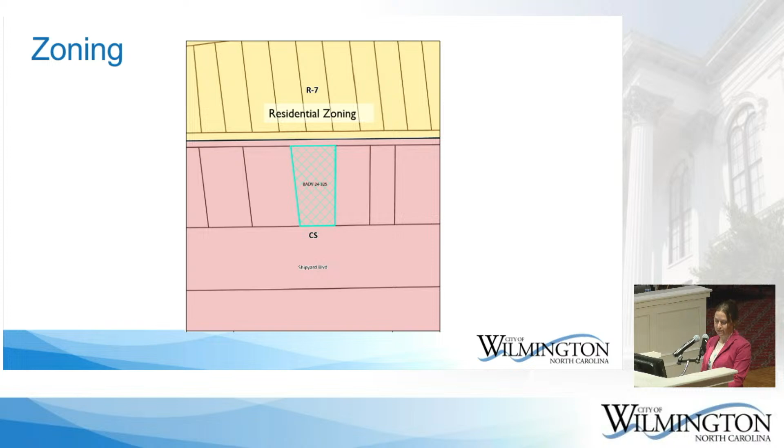Based on the site's location within 650 feet of a single dwelling district and the square footage of the proposed building, the applicant is only required to provide 5 parking spaces. The proposed site plan shows 11 parking spaces, plus a garage door on the rear that may accommodate additional parking within the building, which is more than double the required parking for the proposed use.

In lieu of a reduction to the required parking, the applicant has requested variances to landscaping requirements set forth in City Code Sections 18.318 and 18.321. City Code Section 18.318 requires that parking areas contain sufficient tree coverage to shade 30% of the impervious vehicular use area associated with the project.

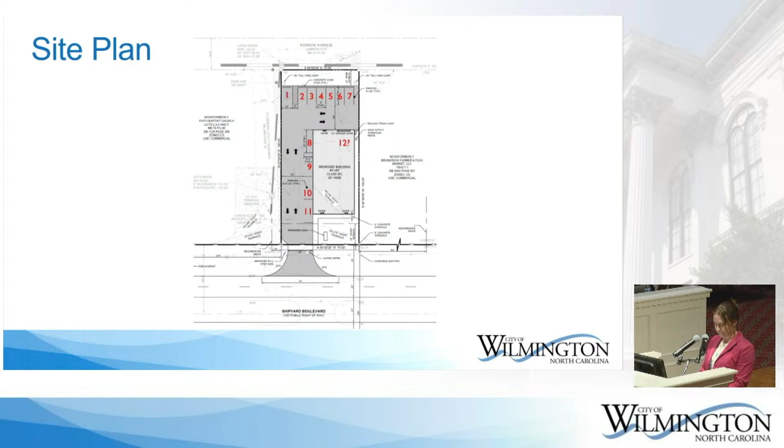Staff would also like to note that the tax map included in the applicant's submittal shows that there was landscaping on the site as of May 2019, but that has since been removed, and there are no approvals on file with the city for removal of that landscaping.

On January 30th, 2025, the applicant submitted a request for a variance to City Code Sections 18.318 and 18.321 to eliminate all requirements related to parking lot landscaping. This matter is set for hearing before the Board of Adjustment today, March 20th, 2025.

I'd like to ask that the board place the case summary and all attachments into the record. I'm happy to answer any questions you may have of staff, but the applicant is also present. Anybody have any questions at this time?

Thank you very much for that presentation, and I'm glad you're concerned about having proper coverage as well as other landscape features. My question is, has somebody calculated what the magic number of parking spaces might be if you also had the 30%? The illustration you just provided was less than 30%, but it's illustrative. Is there a compromise or middle ground number that you all have calculated, or that the applicant could?

We've calculated what the minimum parking requirement would be, and those spaces would be 8.5 feet wide by 18 feet deep. The required handicap space would be larger, of course. We haven't calculated what 30% of that would be on a site plan, because it depends on tree placement. Let me go back to the diagram. Each tree isn't 100% shading the parking lot, so it would just be the portion of the canopy that actually provides that shading.

All right, anybody else? All right, thank you. We'll next ask if the agent for the applicant would like to come up.

Good afternoon, Cliff Brom, RC Engineering, 15226 US Highway 17 in Hampstead.

The business going in here is a relocation of East Atlantic Plumbing. The owner was looking to relocate, found this piece of property, and he's just an old country gentleman, and he had actually gone in and removed trees, built a parking pad, and ordered his building before somebody realized what was going on, not sure who, and told him, 'hey, you need to pump the brakes.' That's where we got involved and started helping him with the site plan and everything.

As you can see on the site plan, the problem we have is we've got 10 pounds of potatoes we're trying to put into a 5-pound sack. So naturally, we've got potatoes that just won't fit.

Like I said, this is a plumbing business. Currently, Mr. Richards has 12 employees, I think 10 technicians, plumbers, and an admin staff of 2. That's the reason we designed the parking like it is, to accommodate his current staff.

Other questions for either the city or the applicant's agent? Yes sir, if I may, perhaps for the city, if you could go back to that slide that shows the lot again without the mock trees, the mock-up of the trees. I'm just trying to figure out what's going on right in front of the proposed structure.

Is that something that cannot be used for that sort of, yes, exactly where your arrow is. Is that something that can't be used for parking, or what's going on there? Yeah, that piece, that's the required sidewalk in front of the building. And then that sidewalk has to come down parallel to the drive.

Okay, and connect to the sidewalk out front. I see. But as far as the rest of the area, yes, that is open. The only caveat there, and it's hard to see on this site plan, is that there is a sight triangle that will be required by both the town and the DOT that will have to remain open, and that sight triangle takes up a fair portion of that open area.

The reason I am asking this is because I was wondering if there were space potentially there for, if one could use some of that for parking in lieu of some other piece of what we're otherwise seeing as parking spaces, if you see what I'm saying. And as long as it was acceptable to the town, I think we could probably get in.

I don't have my glasses, I can't see. Let's see. I'm not sure what the dimension is off of that. Well, we could get two spaces in there, and I'm not sure. I know on another project I've got, DOT requires a certain setback from the road for the parking. And I'm afraid in this situation, since we're right there on the road pretty much, if we try to put parking in front of the building, we would be in violation of the DOT standards.

So with the impervious surface, we would still have to have the islands on the sides of those, the rear parking, what's shown on here now that you can see, 2 through 6. Which would eliminate 2 parking spots. And we would still have to have the landscape strip down the left-hand property line, which then would eliminate parking spots 8, 9, 10, and 11.

So if I understand correctly, and the city can correct me if I'm wrong, with a lot like this, the minimum number of parking spots one should have is 5. You all are planning 11. The maximum would be 12. Maybe you don't know this yet, sir, because you may or may not have talked about this with the person you're representing, but how many parking spaces do you all really need between this magic number of 5 and the proposed number of 11? In other words, are all 11 really needed? I guess that's the bottom line question, sir.

As I mentioned earlier, right now his current staffing levels are 10 technicians, plumbers, and an admin staff of 2, so he's got a staff of 12 at the moment. And all of his technicians have company vehicles, which would be parked on the premises overnight, weekends, and holidays. So there would be a minimum of 10 spaces needed in the evenings and weekends.

Catherine, let me ask you a question. Is there room to continue a conversation on what could be done to accommodate the parking? Right now it doesn't seem there was enough of a conversation. You sort of got surprised when you went to TRC because no one had looked at it before. But it looks like there might be a way that if we continued this to our next meeting, you might be able to meet with the city to come up with a compromise. Because for us, we're going to have to rule based on the 4 findings of fact.

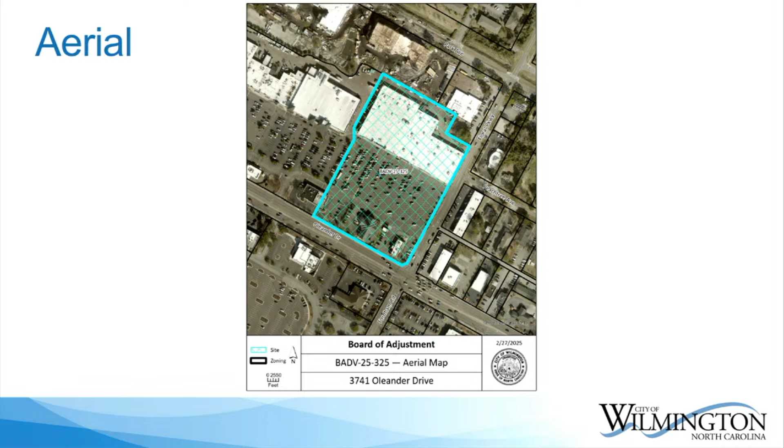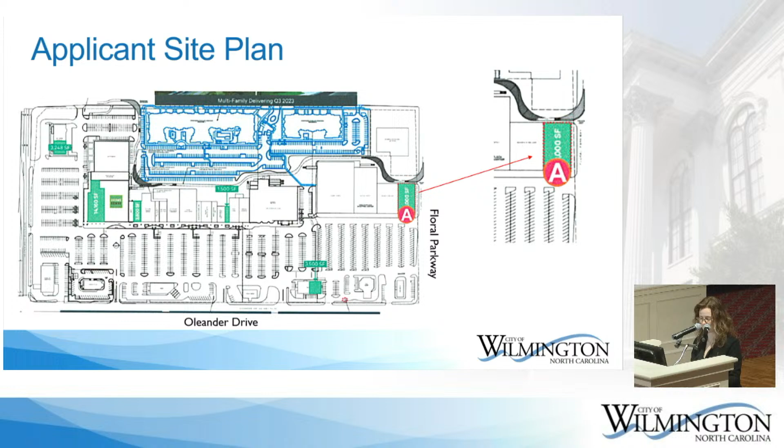The variance request pertains specifically to a corner unit within this shopping center. On or about February 6, 2025, city zoning staff issued approval for a change of use permitting a general retail use to operate from this location. The applicant has proposed one wall sign measuring 131.43 square feet to be mounted on the south-facing facade of the unit.

The Land Development Code Section 18-389 states that multi-unit buildings shall be permitted either 2 wall signs per unit, no more than 1 per facade, up to 50 square feet total, or 200 square feet per building, whichever is greater. Due to the number of units within the building, the option permitting up to 2 wall signs per unit, up to 50 square feet total, provides the greatest amount of signage.

The applicant has requested a variance to Land Development Code Section 18-389 to allow 1 wall sign at 131.43 square feet, a variance of 81.43 square feet.

The applicant states that the visibility of a 50 square foot sign would be limited due to the building's location on the backside of the parcel, as well as the existence of multiple structures on the front of the parcel, further obscuring the view of this unit.

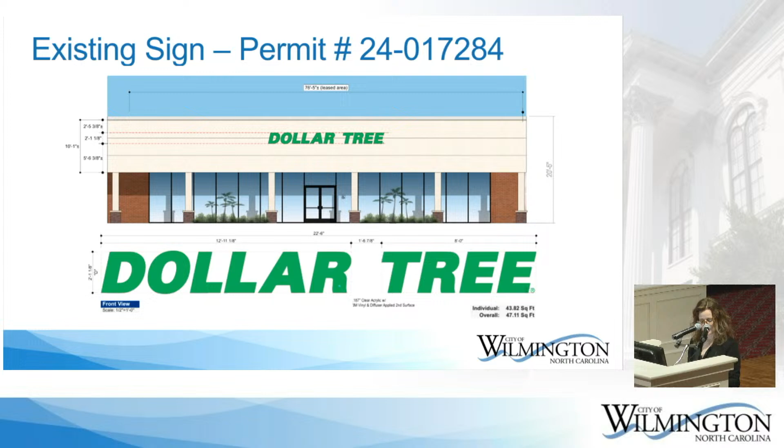In December of 2024, the applicants also received city and county permit approval to install a 47 square foot wall sign at this location, which received a final zoning inspection on or about March 17, 2025. In January of 2023, the Board of Adjustment considered a similar request for a retail tenant in the same shopping center to install a 169 square foot wall sign and determined that the request did not meet the criteria for the board to grant a variance.

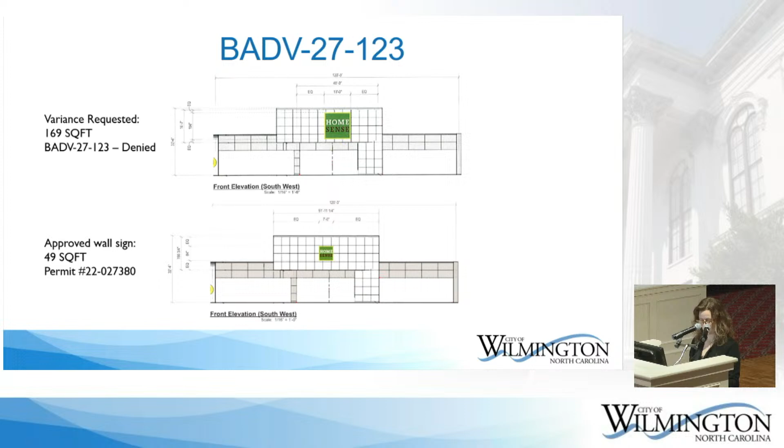On February 4th, 2025, city staff accepted an application for a variance to the wall sign standards for a multi-unit building in the commercially zoned district. This matter is set for hearing before the board on March 20th, 2025. I'd like to submit this report and all the attachments to the record. I'm available for any questions, and I believe the applicant's representative is as well.

Is the sign that's on the building now out of compliance? No, it's within compliance. Okay, thank you.

Anybody else have questions? Yes, sir. Thank you very much for that. Just to make sure I heard correctly, is it theoretically possible to have 2 50-square-foot signs, given the configuration of this building, ma'am? They could have up to 2 signs, but the total area of those 2 signs can only be up to 50 square feet. I see. Thank you. All right, anybody else?

All right, thank you. We'll go for the applicant. We show Heather English. Is someone here to speak on behalf of the applicant?

Good afternoon, everybody. I am Heather English. I am the agent for the sign company and here on behalf of Dollar Tree. Okay, thank you. Can you just state your address for the record? Sure, 8552 Racine Road, and that is in Pleasant Garden, North Carolina, 27313. All right, thank you.

So Dollar Tree loved this unit, moved forward, and this shopping center building is set back about 450 feet from the street. There's a Hardee's, a bank, and also a retail store formerly a Talbot's, clustered in front of this building. Coming each direction down Oleander, those buildings obscure view of the front of that building.

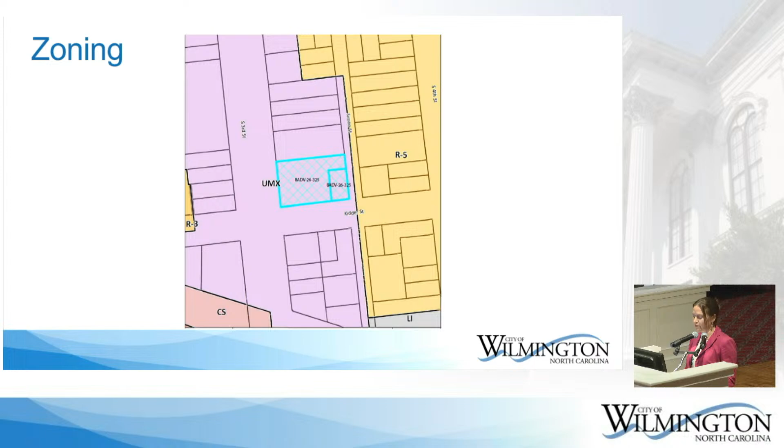Thank you. The subject property contains approximately one-third of an acre. It's located at the northeast corner of 3rd and Kidder Streets and currently contains a commercial structure that most recently operated as a contractor's office. The property is zoned urban mixed use, with other UMX zoning to the north, south, and west, and residential zoning to the east. The UMX district supports a fine grain mix of residential and commercial uses within close proximity to one another, and per the purpose statement outlined in City Code, this district is established to assure an appropriate development pattern is maintained within the 1945 corporate limits by establishing district regulations, including design elements intended to enhance the urban form, increase neighborhood safety, add flexibility for small urban lots, and complement the historic built environment.

The applicant has proposed to develop the property with a residential townhouse project consisting of 8 two-story units.

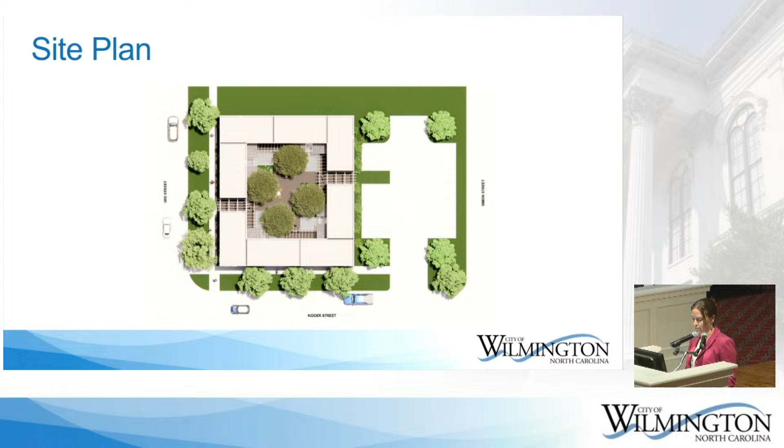The applicant attended a pre-TRC meeting in March of 2023 and was informed of various code requirements necessary for development of the site, including fenestration and alley access rather than accessing from 3rd or Kidder Street. In May of 2023, the applicant obtained a variance to allow direct access from Kidder Street, and the site plan included in your case summary has been updated accordingly.

Also, as part of the formal TRC review, the applicant submitted elevations for the proposed project. In reviewing those, staff determined that the fenestration requirements had been misapplied. Fenestration by code is defined as the arrangement, proportioning, and design of openings, mainly windows and doors, on a building facade, and city code allows glass used to satisfy that requirement to have a maximum of 15% reflectivity. The term fenestration is also sometimes interchanged with glazing.

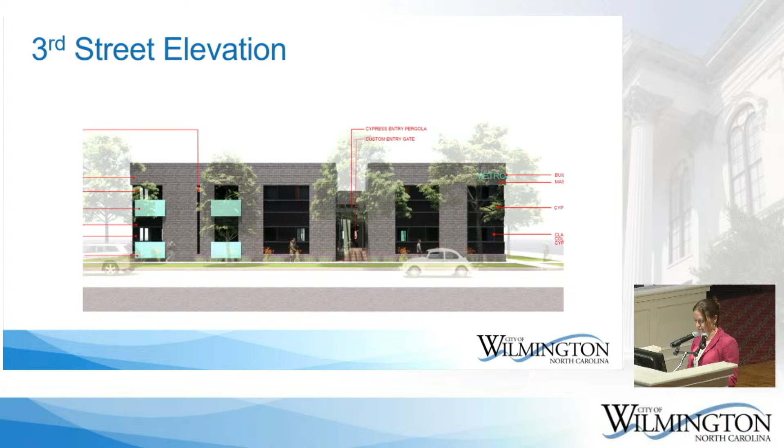Land Development Code Section 1844 sets forth design requirements for buildings in the UMX district to ensure compatibility with the existing development pattern and urban form in general, by requiring that building facades incorporate periodic transitions such as facade offsets, pilasters, changes in materials, or fenestration, and also requires a minimum of 50% fenestration along those street-level facades.

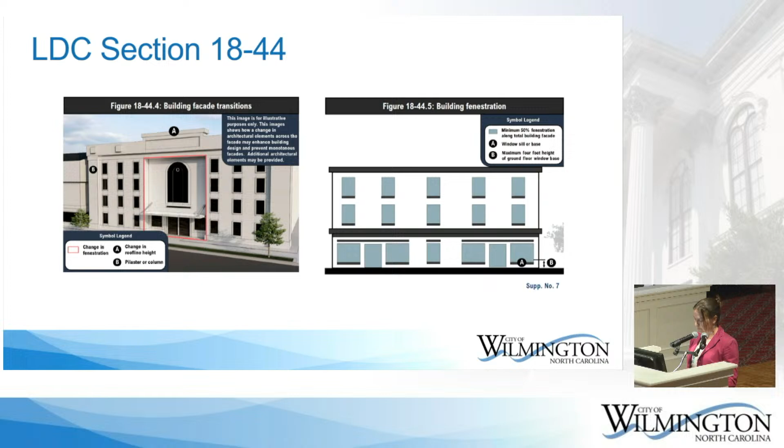Though fenestration can serve as a building transition, a change in materials does not constitute fenestration unless that material is transparent. The illustration on the left demonstrates the meaning of facade transitions, while the illustration on the right shows fenestration requirements and clearly depicts windows and glass openings as those elements used to satisfy the requirements.

This illustration, prepared by the applicant, shows what they've included for the purposes of calculating fenestration, which amounts to 59% of the ground floor facade. However, the applicant has included solid material as glazing.

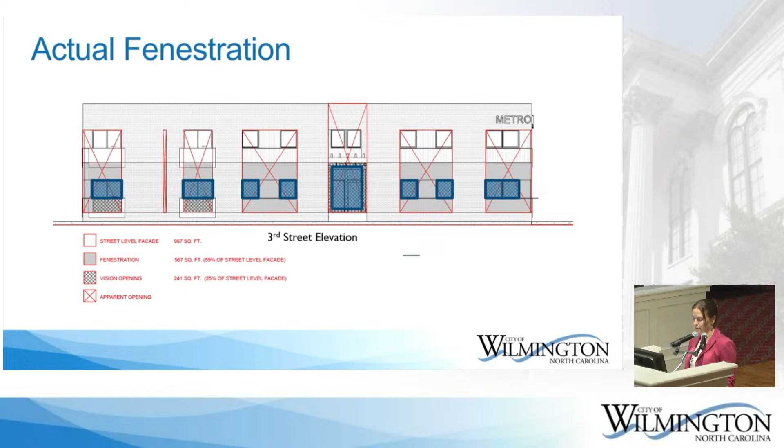What's shown in blue outlines the portion of the facade that would be considered fenestration per city code. And that appears, just taking all the boxes and shoving them into a corner, to be about maybe 20% of the ground floor facade, and that's along the 3rd Street elevation.

We'll just quickly give the same rundown on the Kidder Street facade, along which fenestration requirements are allowed to be reduced from 50% to 30%, as long as the applicant includes additional architectural treatment along that facade.

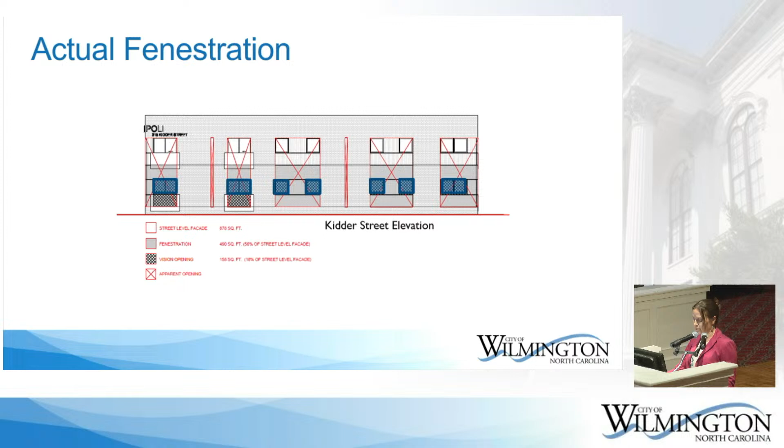So this illustration shows the applicant's calculation, again including some solid materials. This illustration shows staff's assessment of what should count, and this illustration would suggest that the actual fenestration provided is about maybe 15% of the facade.

On or about February 7th, 2025, city staff accepted an application for a variance to City Code Section 18-44 for fenestration requirements in the urban mixed-use district. The specific numeric amount of the request has not yet been provided, as we have not established the exact amount of ground floor fenestration that is proposed.

And in reviewing the graphics in greater detail, staff realized that some of the areas depicted as vision openings on one of the diagrams also seem to be covered by a perforated metal guard, which would render even that opaque.

This matter is set before the Board of Adjustment today, March 20th. I'm happy to answer any questions you may have of city staff, and the applicant is also present.

All right, does anyone have questions of Catherine at this time?

Yes, sir, thank you for the presentation. So you just mentioned something which is very interesting, I hadn't thought of that, or didn't quite click before. Perforated guards. So under the code, if you had a window that was fenestrated, but you then had some sort of perforated balustrade or something like that, does that eliminate that much of the window from consideration as a percentage of the building that is to be fenestrated? Is that what I'm hearing you say?

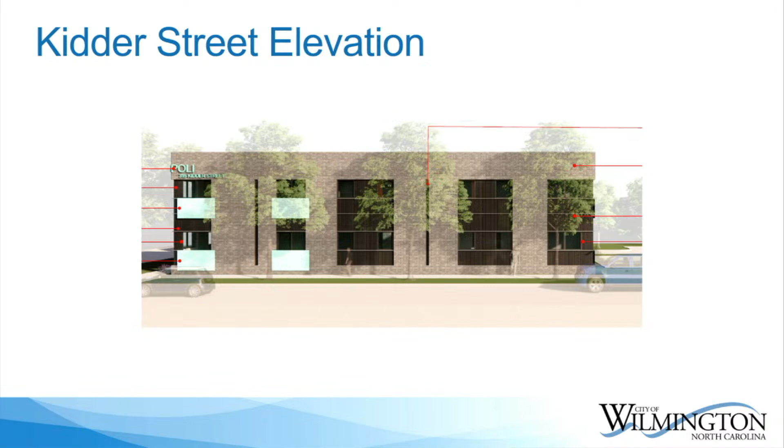But we didn't just want to put a regular guardrail on there. We wanted to do something perforated for two reasons: to provide some privacy, but also to let light come through. The perforations are so fine that it would probably be more than 75% open. I could give you the specification on the sheets we were intending to use. It's a company called McNichols, and they have a catalog of different perforated sheets. We've used them before for all sorts of things, for fireplace screens, and for a lot of different crafts we've made in the past.

But in this rendering, it appears as a solid white blob that's obscuring things. You are correct in assuming that at night, if the lights were on and you drove past, the glass would be as clear as, I guess, 100% clear, and there would just be a slight veil. You'd be able to see people moving behind it, and I think it would actually be more exciting than just a plain wall. So I think that's probably an error in assuming that it's opaque.

Oh, I was actually thinking the other way, that letting some light in, and the fact that it's perforated, would allow sunlight to come into your residences. Yes, and the other way you can see through it too. It's just kind of like a veil, like my mom used to put sheer curtains up in the front of our house, so you could barely see through. It's that sort of effect we're after. We want to be able to see through it, but at the same time, if you're sitting still, somebody wouldn't be able to see you behind that.

So the reason we're here is we've studied this UMX, and we did the townhome projects a block away at LaRue. The difference between this development and LaRue is those townhomes are 16 feet wide, slotted one next to the other like an old-fashioned row house development. When you have a building that's say 35 or 36 feet deep and 16 feet wide, you've got to put as much window on each end as possible to get light into the depth of the building. If you want to hide from the street or the backyard or courtyard, you put your living room in the center where it's dark and nobody can see you. So LaRue barely made the 30% or 50% glazing on the street side.

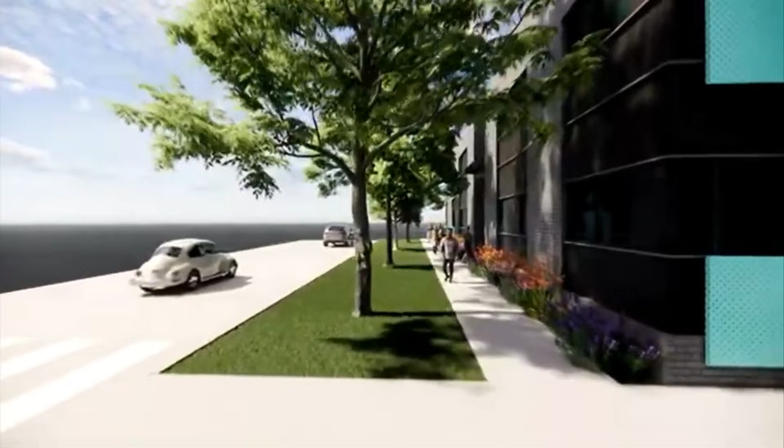So each unit has a scupper where the water pours off to the inside of the courtyard, and it falls into a rain garden. When that rain garden fills up, it spills into another less wet area that has cypress trees in it.

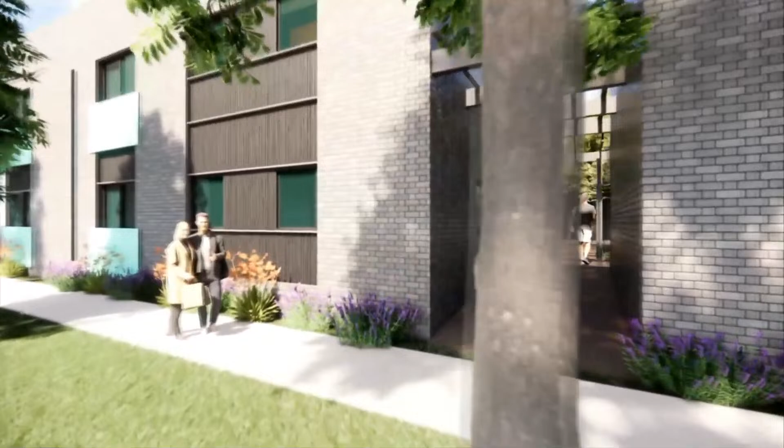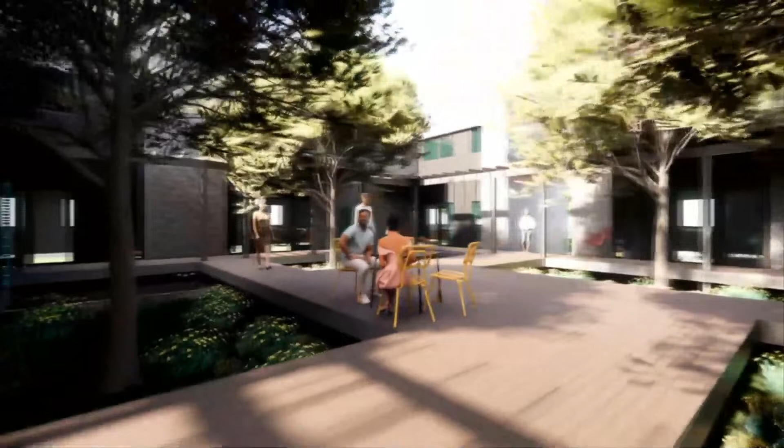Above this whole thing, the idea is this is supposed to be like a little representation of Greenfield Lake. I want this to be kind of swampy, full of all sorts of critters, and this boardwalk just floats over top of it. There are 4 cypress yards in there, and then there are 4 ponds in there.

So each of these residences has a deck and sliding doors and windows that open into this oasis. And that's why this is so much better than that LaRue project that we did, because it creates this atmosphere on the inside.

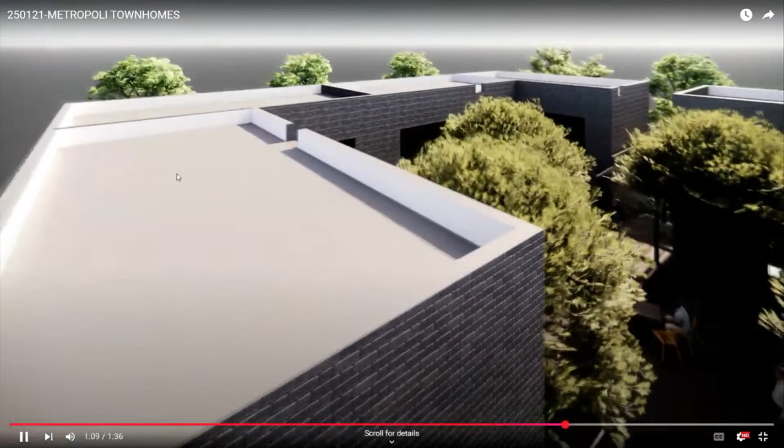Kevin is great. This is Kevin Stevens back here. He's an architect, and he works in my office, and he's a whiz at making these come to life.

So it really is a typology that hasn't really been explored here, and we could probably meet the fenestration requirements if we took all the windows off the courtyard side and put them on the outside of the building, and pushed all the beds up against the walls on the courtyard side, focusing our attention on the street from the interior. But that's not what we're trying to do.

But you can see with the renderings, our intention was to really create giant groupings of windows and get the massing to look like the windows were bigger, or like there are larger masses. But we're confused as to why you would want 50% windows on the ground level.

If we were trying to convey that this was a storefront -- and when you see all the images in the LDC, it seems obvious that some of these images Ms. Thurston posted are for commercial establishments, where people are supposed to have their wares on display, the lights are on, and we go in there and buy T-shirts or whatever it is -- but we're not selling T-shirts from these townhomes.

We're just trying to have a private dinner in there.

I think it can date back to when Family Dollar decided to put windows in and then put boards behind them, back in the day when they changed -- that was in the old code. I think a lot of it was in the UMX, where the commercial side needed to have that clear sense, but we haven't addressed residential in the UMX the same way. It seems as though the code is written as though all buildings in UMX are mixed use, but we've decided, by right, to create just a residential development. Furthermore, we didn't go with the highest density -- we could get 9 units on this, but we went with 8 to create this geometry, which works well for this design. I think it was really the only way to do it.